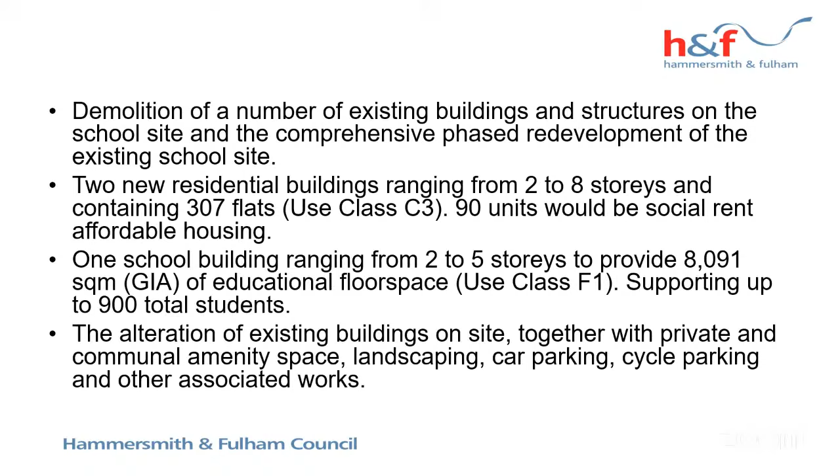The proposal is for the demolition of a number of existing buildings and structures on the site and a comprehensive phased redevelopment of the existing school site. 2 new residential buildings ranging from 2 to 8 stories in height, containing 307 flats to be created, 90 of those units would be social rent affordable housing. 1 school building ranging from 2 to 5 stories, providing 8,091 square meters of educational floor space, supporting up to 900 total students. The alteration of existing buildings on site, together with private and communal amenity space, landscaping, car parking, cycle parking, and other associated works.

The site is shown here, highlighted in red. Phoenix Academy is a secondary school and 6th form that occupies a site of some 2.96 hectares on the northern side of the curve, with access also being available from Bloemfontein Road. The main school buildings, as you can see, are arranged around a courtyard area, varying in height up to 5 stories.

Most of the buildings date from the mid-20th century, but the 6th form building centre, considerably newer, was built around about 2010. There's some aerial photographs here, so you can see the sites. You can see the school buildings here. This long block I'm indicating with the cursor is the 6th form centre, and then you see to the north there's sports facilities and pitches, and a large grassed area to the west of the site, behind the properties on Milfoil Street.

The site is located within the Old Oak and Wormholt Conservation Area and the Cleverley Estate Conservation Area, and the Grade 2 listed former Wormholt Library and centre lies about 200 metres northwest of the site.

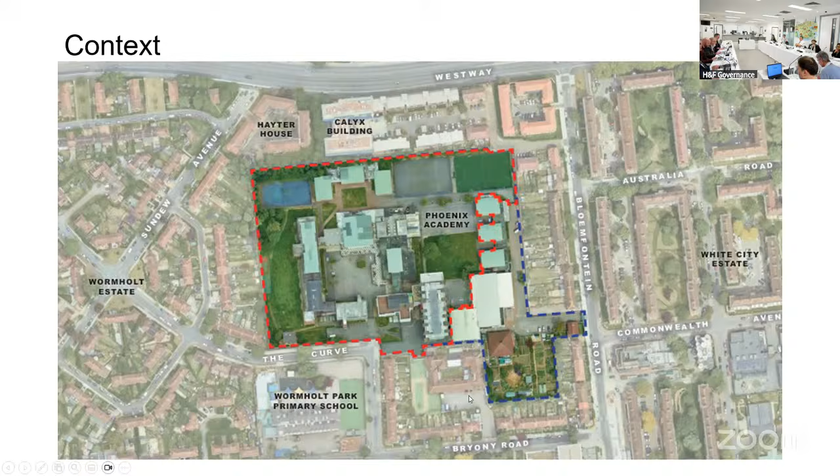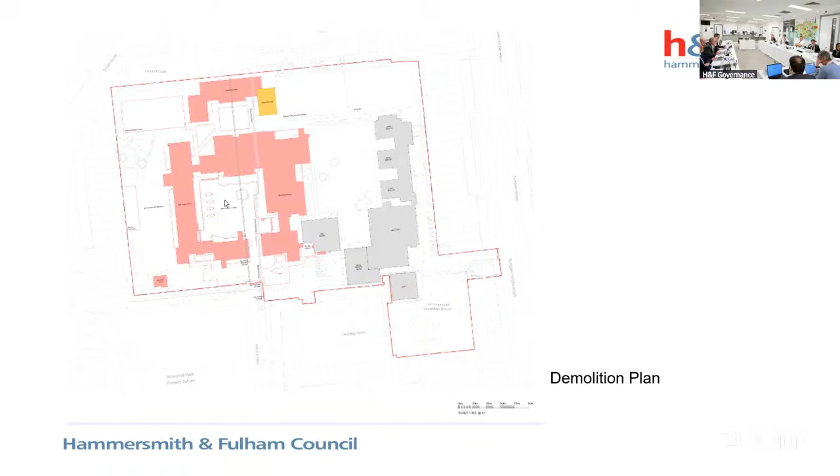This image, the buildings highlighted in pink are to be demolished, and the building in yellow would be demolished at a much later stage. These were demolished at the initial phase.

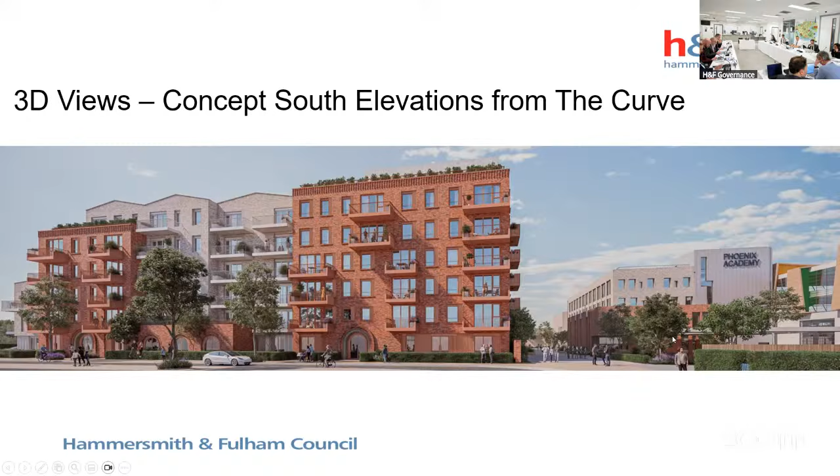These are the elevations, south elevation of buildings A and B, which are the northernmost block of the residential development. Again, keeping a very similar design and style.

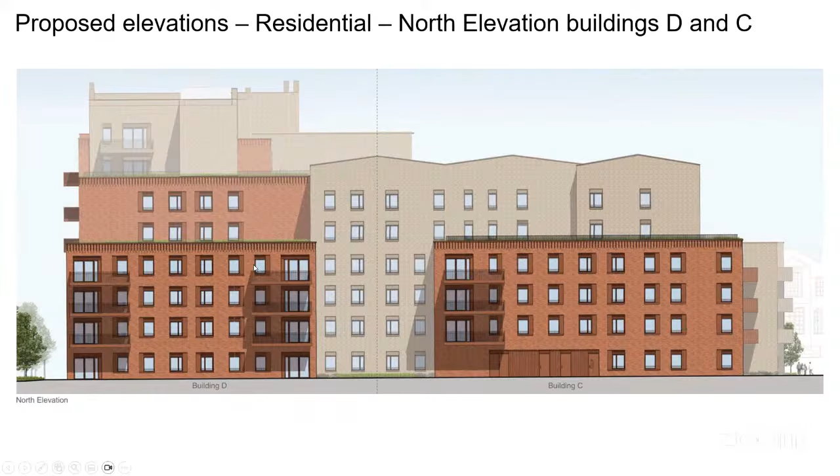This is the north elevation of the southern buildings, buildings D and C, although they are all joined. Again, you can see the red brick and the lighter brickwork. You can see the heights rising up.

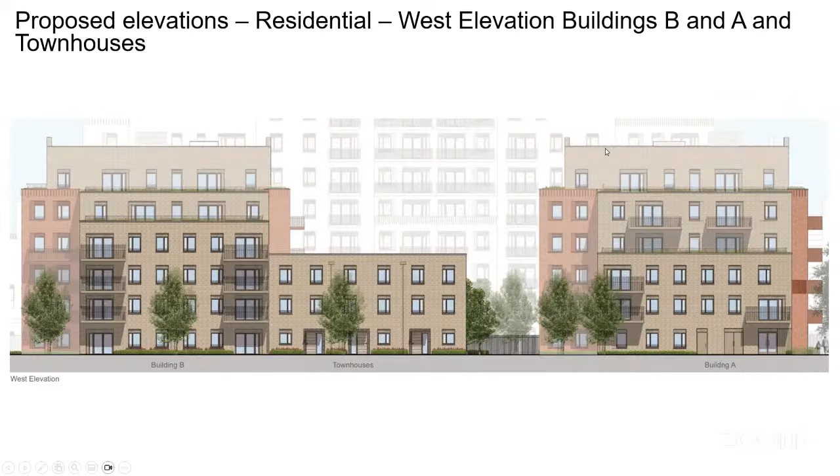It just shows the layout of the flats. You can see there are five flats along this elevation in this block, 4 there. And a lot of the flats, the majority, are dual aspect, although there are some where it is not possible.

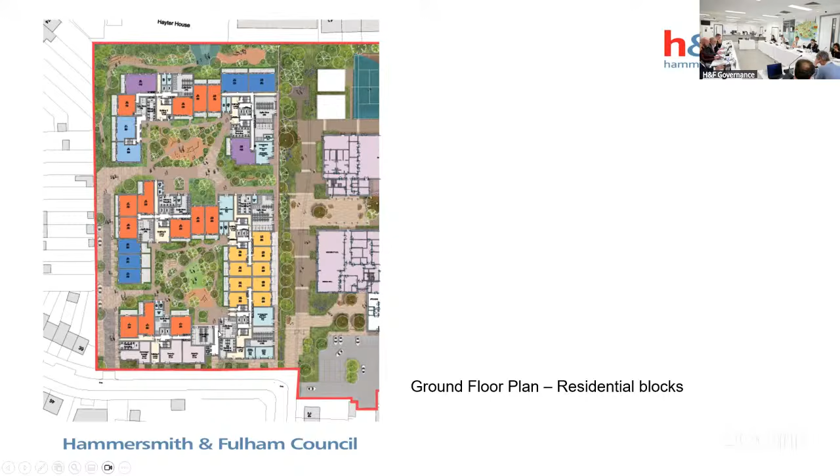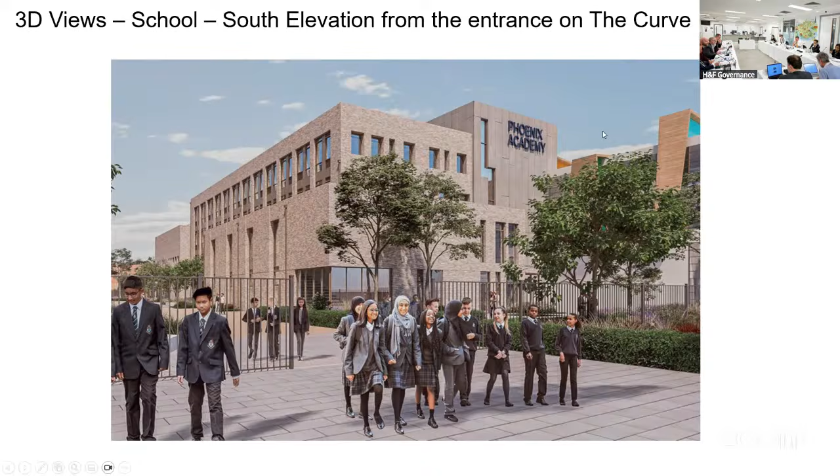There's some 3D views of the school. The south elevation, from the entrance on The Curve. You can see the pale brickwork, very similar to what's been proposed for the housing. And you can see the existing sixth form buildings behind them.

The ground floor plan of the school is set out here. You can see the classrooms and the makeup of the spaces.

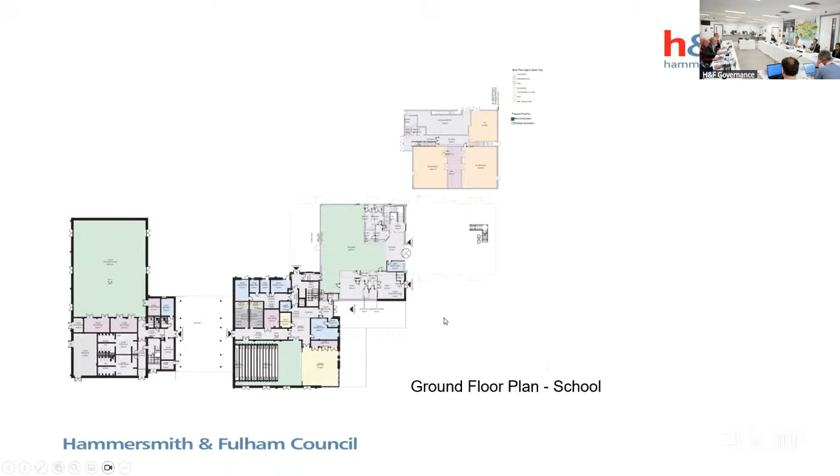And again, the first floor plan, with various classrooms set out. And the second floor plan. And the third floor plan, see there.

The scheme proposes 90 affordable housing units, a mixture of 10% one bed, 40% two bed, 35% three bed, and 15% four bed. Those are the policy targets, HO5.

The scheme provides 11% one beds, which does not meet the policy HO5 target for two beds - it's 13% lower. For three beds it's 5% higher than the policy target, and for four beds it's around 7% higher, a variance of 7%.

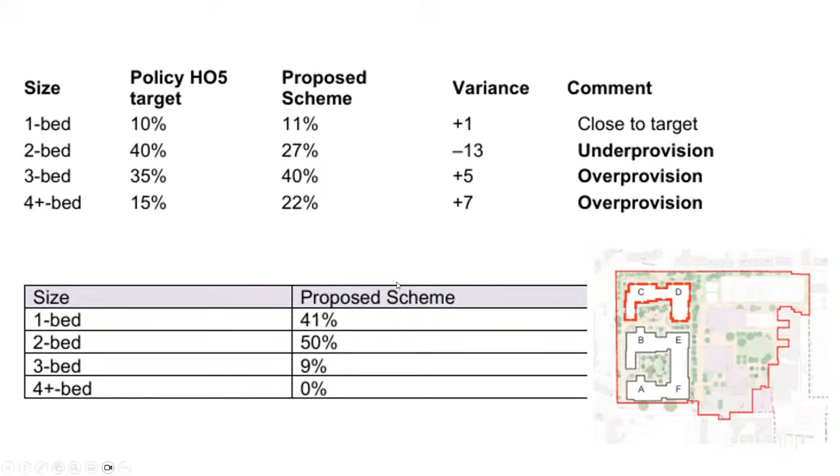The officers have some concerns about the affordable housing. It's all proposed as social rent, whereas our policy would normally seek a mixture of both social rent and intermediate housing. So there's no intermediate housing proposed here.

This diagram demonstrates the existing sports facilities on site. You have Mugas on the northern boundary side, providing soccer, netball, and tennis courts. Then there are allotments here, which provide opportunity for habitat areas.

The existing tree line to the north of the site acts as a noise buffer. There's a Muga there, which is not currently used and is in poor condition. There's another sports facility here which, as shown in the image earlier, is underused.

In terms of the proposed development, the existing Muga is retained and improved. There's another sports area here provided, and then there'd be an outdoor classroom, storage sheds, heat pumps, etc. There are some small playing fields, as well as a student exploration area, here where the cursor is.

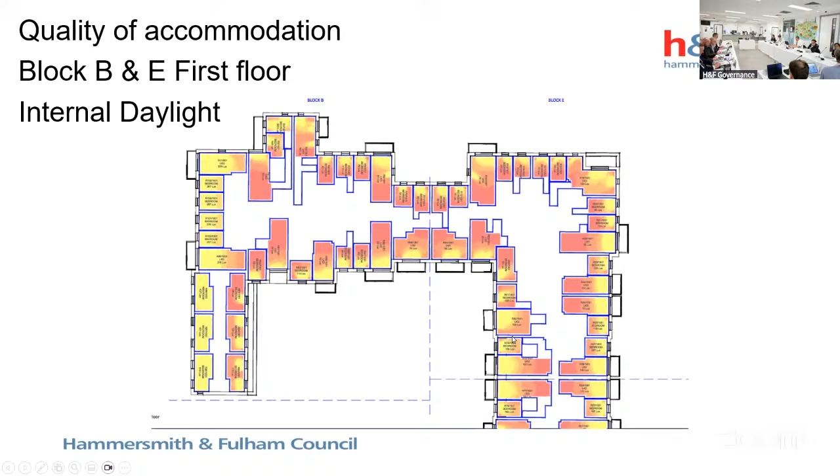In terms of the accommodation provided, for this block on the first floor, the diagram here shows internal daylight to the rooms of the block. The red/pinkish areas are where there is not satisfactory provision of natural light, and the yellow is where it does meet acceptable levels. Officers have concerns - there are a number that meet the target, but there are a significant number where internal luminance is a concern.

So we do have concerns about the cumulative impact in terms of daylight and sunlight with regards to these properties and their amenity space.

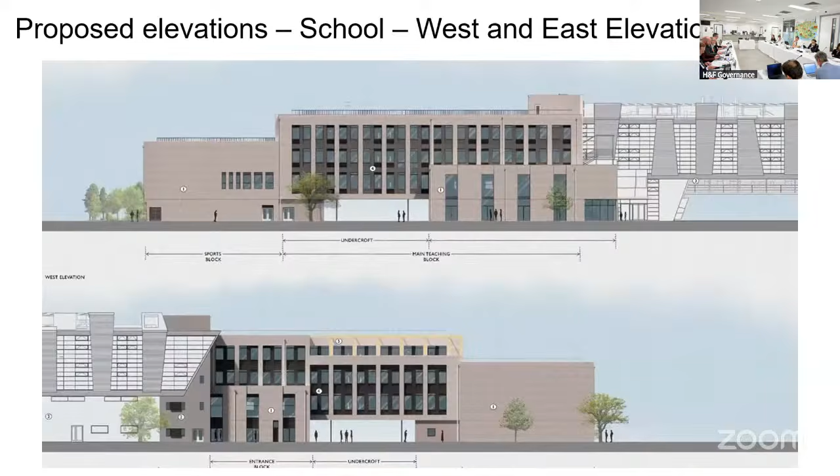The new sports hall, if I can show you back up - sorry, the new sports hall, which is here, is going to be a benefit, because if all other matters were considered acceptable and we were looking to approve, then we would seek for that to be made available for perhaps external use, subject to agreement.

Sport England have strongly supported the principle of community use agreements.

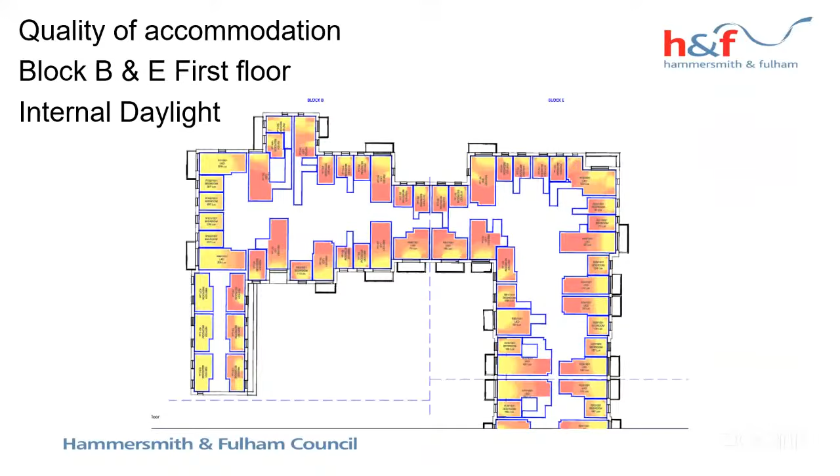At present, the concern that we do have is that Sport England have raised concerns that the sports provision is not acceptable, as it does not replace what is there currently. So there are concerns both from officers and Sport England with regards to the level and quality of the sports provision.

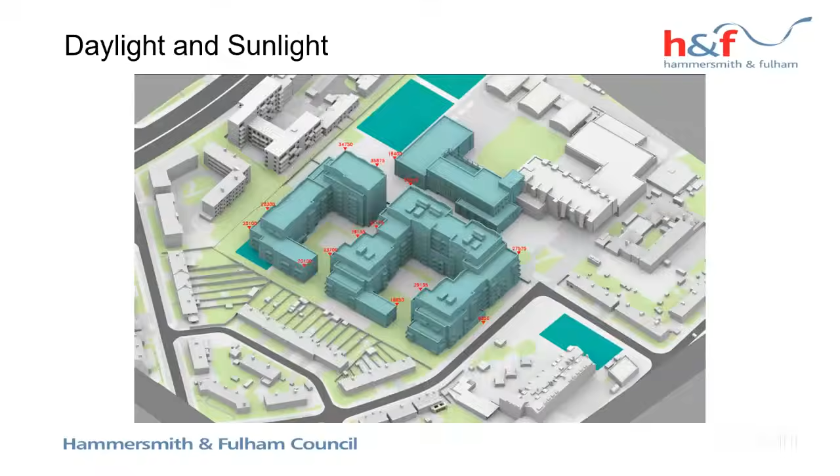So on balance, officers have weighed up the benefits and the concerns about the development, and our view is that the application should be refused. We feel the benefits do not outweigh the harm.

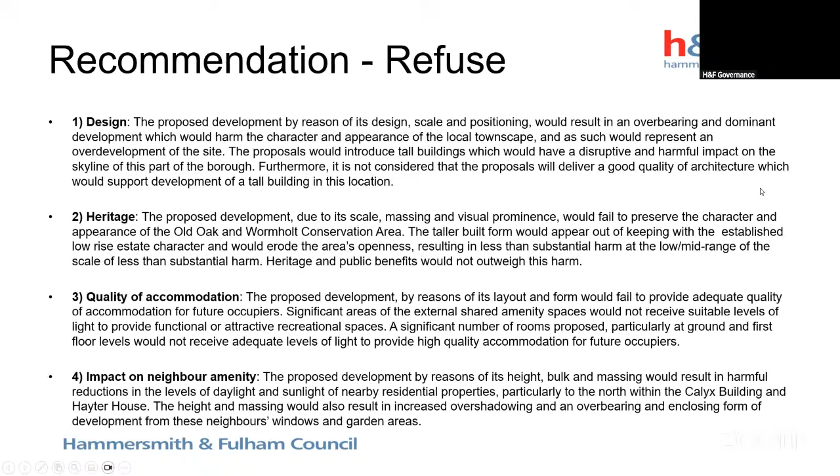It's also considered that the development, by reason of its height, bulk and massing, would result in harmful reductions in the levels of daylight and sunlight to nearby residential properties, particularly to the north at the Calyx building and Hayter House. The height and massing would also result in increased overshadowing and an overbearing, enclosing form of development to these neighbouring windows and garden areas.

Regarding the sports facility, the development fails to demonstrate why existing sports facilities and open spaces are surplus to requirements, that replacement sports facilities are of superior quality, or that there are other clear benefits resulting from the proposal that outweigh their loss. On affordable housing, the development did not adequately justify the provision of affordable housing, which would fail to meet adopted requirements in terms of the amount, tenure, mix and location of the units.

On biodiversity, the play space would result in the loss of on-site habitats of moderate value that would not be replaced on site in accordance with the biodiversity net gain trading rules. The development would also result in the loss of a category B tree, for which no mitigation has been proposed. There's also inconsistency between the tree surveys and the documentation of the landscaping statement. The urban greening factor calculation and BNG assessment are such that the accuracy of these calculations cannot be verified, resulting in a potential failure to achieve the values set out in the application documentation.

And in terms of school parking, the development, by reason of over-provision of parking spaces for the school without robust justification, is considered to be unacceptable and would result in vehicular movements as well as having an impact on highway conditions to the detriment of sustainable transport modes.

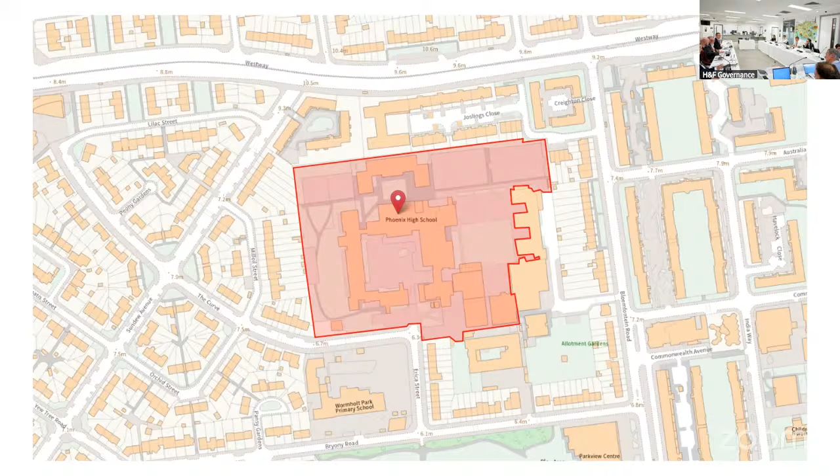Yes, as I said in the presentation, the affordable housing is all in the northern block, in this block here in the northwest corner of the site. All the affordable units are together there. I understand that in itself, the way they're located goes against the local plan policies. Ideally we prefer to have a mixed community, mixing the affordable housing throughout a development scheme. It doesn't always happen, but that's certainly what we strive for.

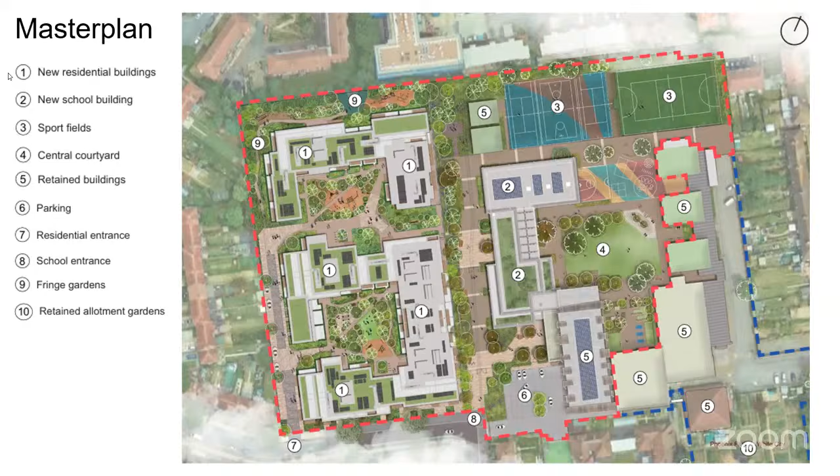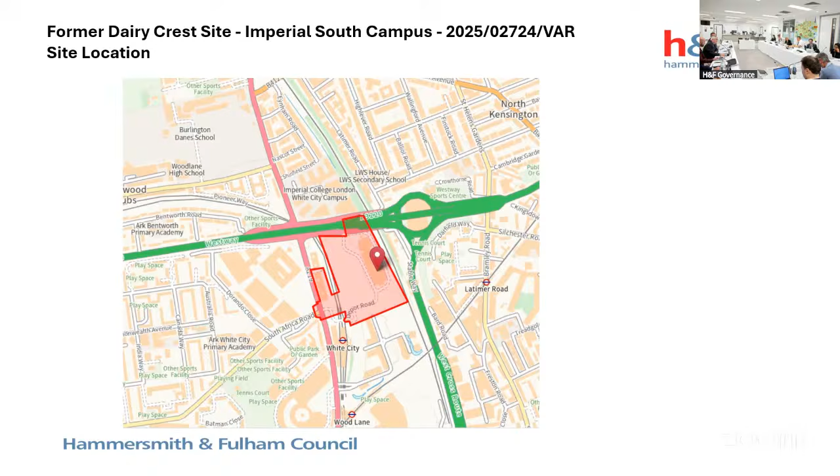This next slide shows the application site outlined in red. Outline planning permission was given for an employment-led mixed-use master plan, which also included a residential element of up to 373 residential units. The development is planned to come forward in 4 phases and 7 zones over an estimated period of 21 years. The application site itself is just over 5.6 hectares in size, located within the White City Opportunity Area and in one of the borough's regeneration areas.

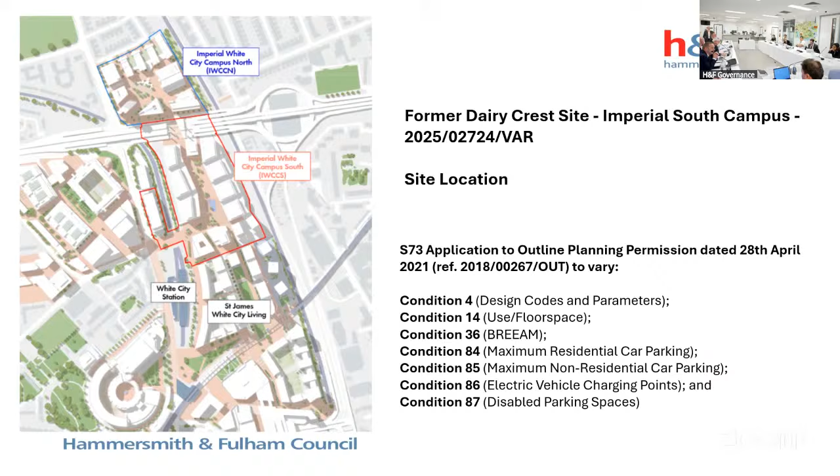This next slide shows the proposed changes made to the Section 73 application. As pointed out, the key driver for this is the proposal to include academic floor space within the master plan of up to 42,200 square meters. This results in changes to key control documents like the parameter plans and the development specification, and the bullet points listed summarize some of the key points and changes.

Another key driver is the removal of a basement ramp and tunnel that was granted in the original outline planning permission. This will now result in an at-grade delivery and servicing arrangement. The other key factor is a substantial reduction in car parking spaces on the site, which will now effectively be a car-light development with only 23 blue badge spaces proposed.

The other key factor is the energy strategy. When this permission was granted, it proposed a gas CHP system. What's now being proposed is a more decentralized air source heat pump system. This will be heated on a plot-by-plot basis, although there are aspirations for this all to be connected to a wider heat network.

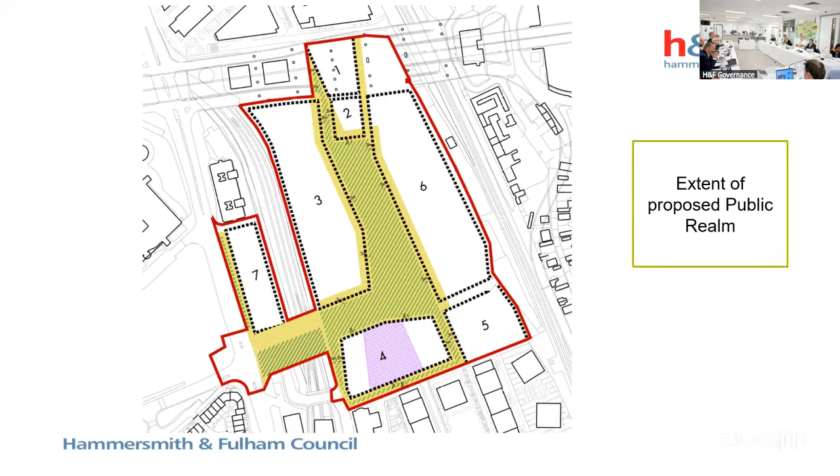This next slide summarizes the proposed floor space. Now, the key issue here is that there's no uplift in the maximum floor space of the development compared to the original outline planning permission. What has been introduced, though, is the academic floor space, which is 42,200 square meters. This allows the applicant some flexibility in terms of what uses come forward within that overall cap.

The next slide shows the changes between the consented and proposed zones, and on the right-hand side you can see development zone 3 is now split between the academic element, which is in green, with the research and development floor space in blue.

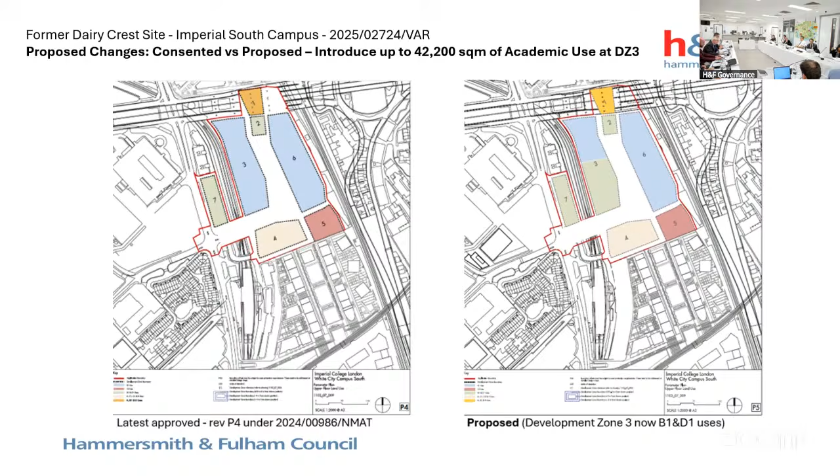The next two slides effectively show the proposed changes to the access and servicing strategies. The servicing arrangements will be operating in a loop system via the bridge access, either clockwise or anti-clockwise. Obviously the key element here is ensuring that pedestrian access is retained, because one of the key drivers of this master plan within our local plan is retaining connectivity through the site to other sites, either to the north or south of the campus.

And then lastly, I just wish to bring members' attention to the proposed academic use. Although this isn't formally being considered tonight, I just thought I'd show you some slides. So this is the location of the academic building, which is on the left-hand side.

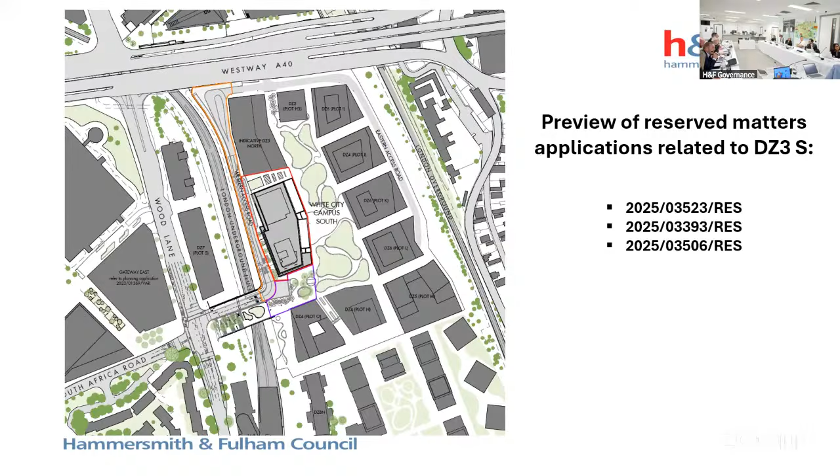The next two images show the location of DZ3 South in context with DZ3 North. Development zones 3 and 6, with zone 6 being where the scale space building currently is, are the two largest development zones within the master plan. As you can see, the academic building will be a key building in this master plan, given its location

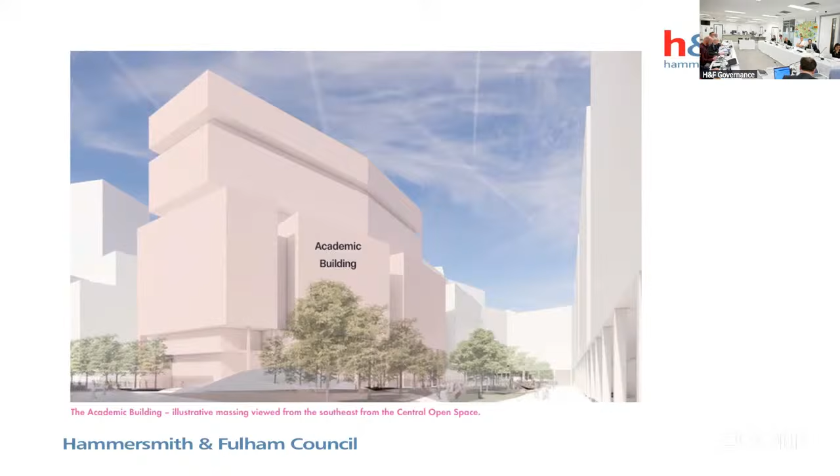by the new bridge. Lastly, some images of the illustrative massing of the academic building, and two CGI images of the proposed building being considered under the reserved matters application.

The recommendation to committee from the executive director of place is that planning permission be granted subject to conditions and the completion of a satisfactory deed of variation to the section 106 agreement.

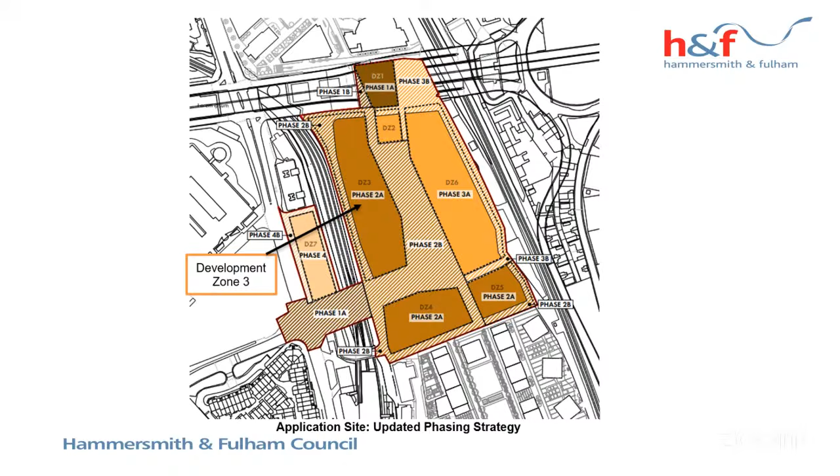Councillor Kamel, quick question. Yes, thank you. Do we have any reasons given by the applicant as to why the CHP system is being replaced with a more expensive system?

Well, obviously the aspiration of the applicant is to create a fossil-free system, which is in line with the London plan. Can I interject, Councillor Carmel, that I disagree with the assertion that a CHP system is cheaper than a heat pump. It's widely reported and widely known that the running costs of a heat pump or networked heat pump system are significantly lower and would return on the investment within a few years. I'm grateful for that, because I know you have specific expertise in that, so I will replace what I have been told before with what you have said. Thank you.

If I've understood this correctly, there's a 10% increase in height on these buildings, and the addendum - sorry, no, I'll get on to that, that's the next bit - also refers to changes to the setback. Do we have a comparison picture so we can judge what the difference in height is and how the setback is done? Will the setback cover the entirety of the increase in height? And can we compare what was approved in the original outline application compared to what is being proposed to us tonight?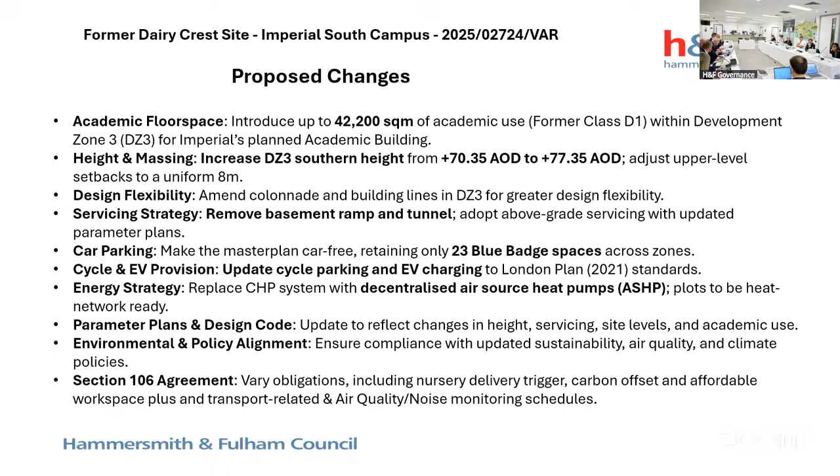What I can show you is the CGI images. Just before you do that, John, just to re-emphasize what John said earlier, which may have been noticed.

This is not an application for the approval of the building. This is to change the parameters. It's more like changing the jelly mold, if you like, of what could be designed within them. So the height is necessary because the building will be higher, but it doesn't actually design the building, it just allows for it. So what you're seeing now is actually the reserved matters that's come in. This hasn't been to committee yet, and it can't go to committee until the 73 has been approved.

Okay, thank you. Are there any further questions? Yeah, just a quick one again, not again, but on the addendum. I noticed on the addendum, on page 209 of the application, on paragraph 12.73,

it appears to me, and I could be wrong, that due to copy and pasting, you included some of the information that was used for the Earls Court development site, because it talks about the former exhibition centre building, and you've just taken out two sentences. But does the rest, for instance, the mention of June 24 and the recent geoarchaeological monitoring of the geotechnical works and watching briefs to the east of the site, relate to this site, or is that also copied? It just seems, if you're having specifics about specific dates, that you accidentally copy and pasted it, and it happens. I just want to make sure that this is now going to be the right information before us.

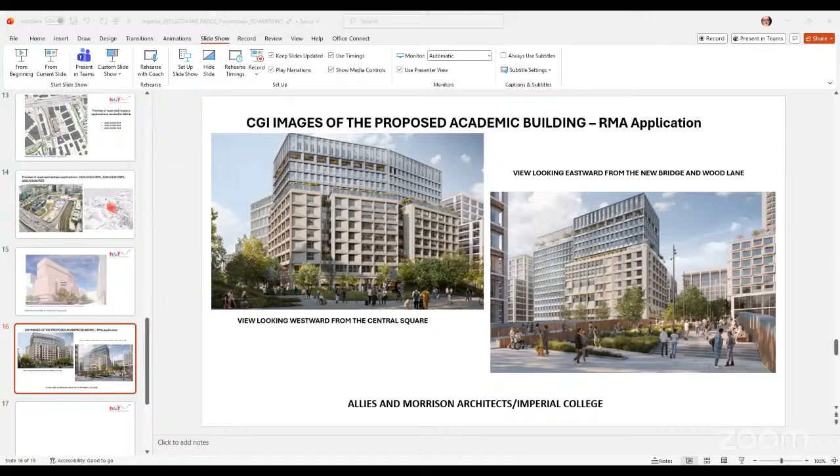Probably should. Another year at least, isn't it? Just delayed during COVID at one point.

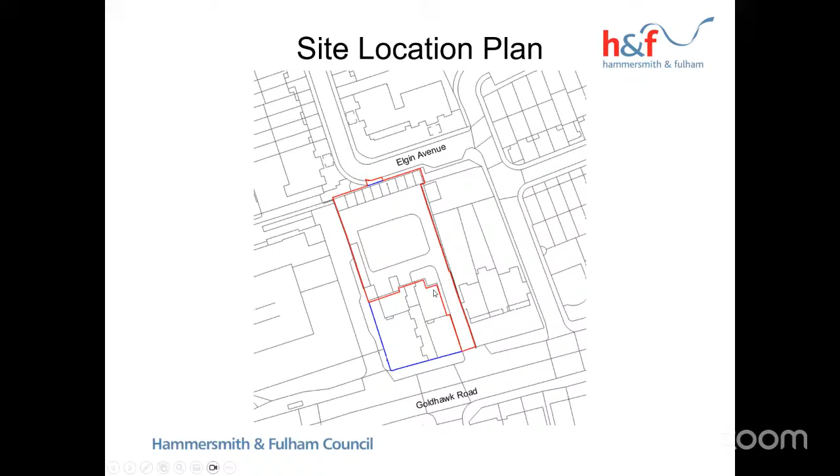It's a council-owned scheme proposal. Site is shown here. The Grange itself is in that blue section to the front of the site, and you see the row of garages to the rear on the north of the site, backing onto Elgin Avenue.

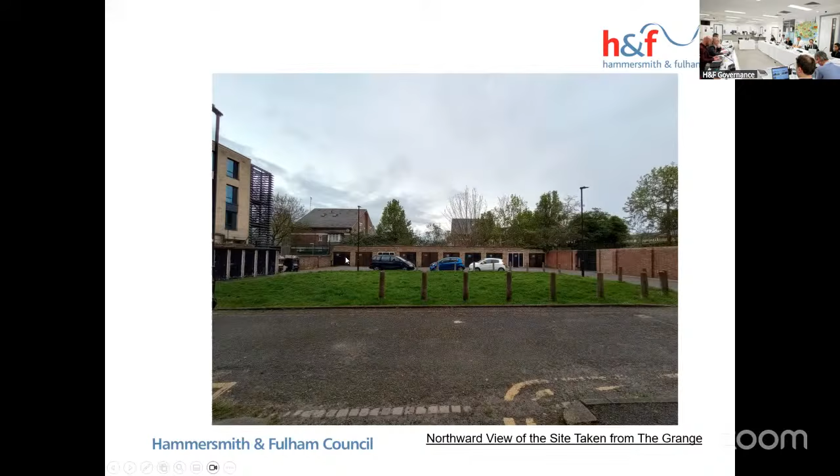Some site photographs: this is the entrance into the site from Goldhawk Road. You can just make out garages to the rear. There's this informal green space in the middle, and some pram stores on the left, and these garages to the rear. The garages are vacant at the moment; they're not used.

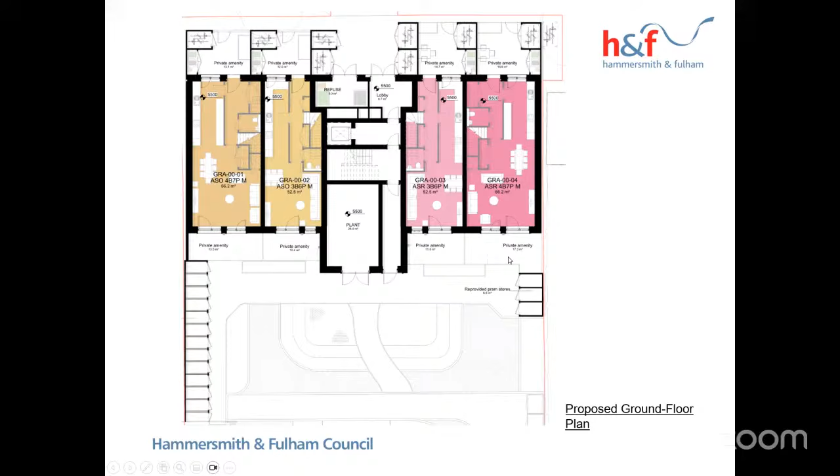The ground floor proposal shows 4 maisonettes, all dual aspect. The pram stores are located here on the left still. Three pram stores would be lost in the development but have been re-provided on the other side. The maisonettes have private amenity space to the front and rear of the site, with a plant room, lift and stairs up.

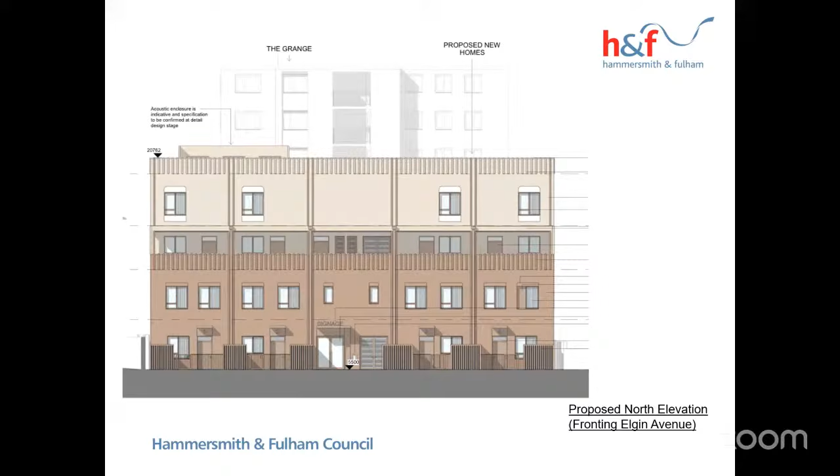The north elevation of the new units faces onto Elgin Avenue, and the southern elevation faces onto the Grange. And then just a quick section through the site.

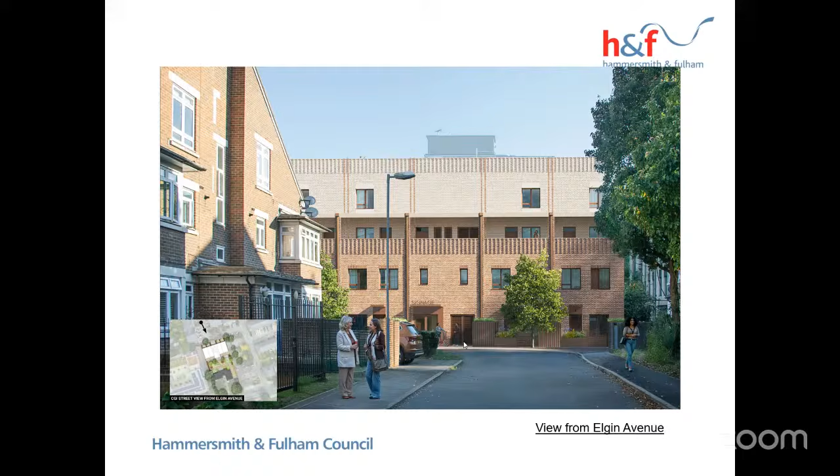The CGI is the view from the existing Grange, showing the landscaping and communal amenity space which will be available for future residents as well as the existing residents of the Grange. That's the view from Elgin Avenue, where the units would have access.

There will be 100% affordable homes provided. It's only 8 units, so it doesn't trigger the policy requirement; however, it's a council-owned development, and all 8 units will be affordable. 75% of them would be shared ownership, with 25% being for rent.

These matters have been resolved. On overlooking, there are no problems from the new units to existing windows. The rear garden of the nursery would be overlooked, but it is overlooked currently, so there's no real change. Officers are recommending that planning permission be granted, subject to legal documents and subject to conditions. Thank you.

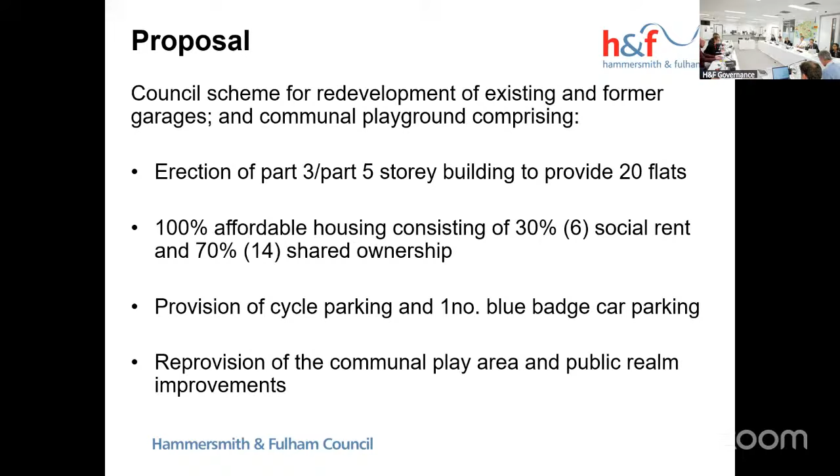The site is bounded by Askew Crescent to the northwest and by residential blocks within Becklow Gardens estate to the north, east and south. Vehicular access to the estate is provided from Askew Crescent to the north, as well as from Becklow Road to the south. The site is not within a conservation area.

The surrounding area is predominantly residential. You can see just to the top of the site are 5-storey residential blocks of Becklow Gardens, and to the bottom of the site and adjacent to it are 2-storey terrace housing on Askew Crescent.

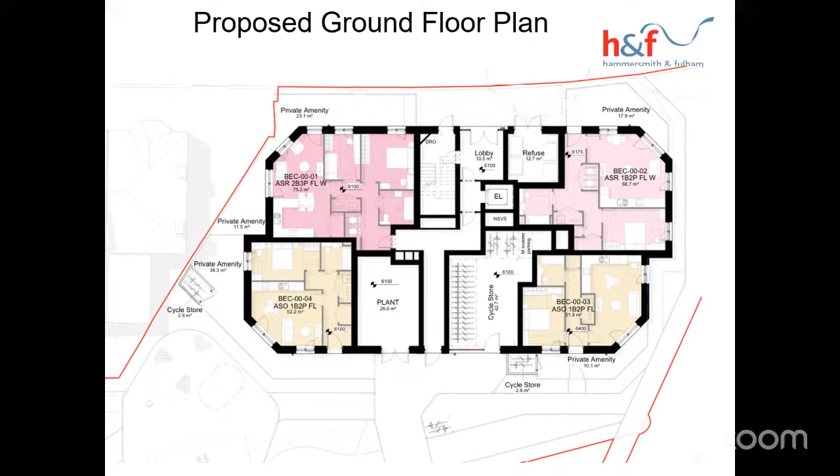The residential units will be spread across 5 floors and will consist of 7 1-beds, 11 2-beds, and 2 3-beds. This is the proposed ground floor. 10% of the units will be wheelchair accessible, and these are the 2 units here, front, highlighted in pink - a 2-bed and a 1-bed.

Long-stay cycle parking is provided internally here, as well as within the rear gardens of the 2 flats at ground floor level. There is also short-stay parking here to the rear of the site, and refuse storage is provided internally to the Askew Crescent frontage, where it will be collected.

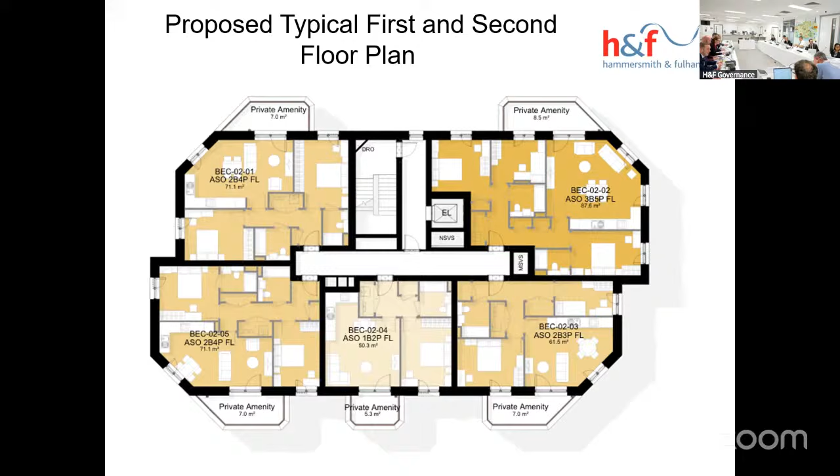This is a proposed typical first and second floor plan. As you can see, all units would benefit from private amenity space in the form of a balcony.

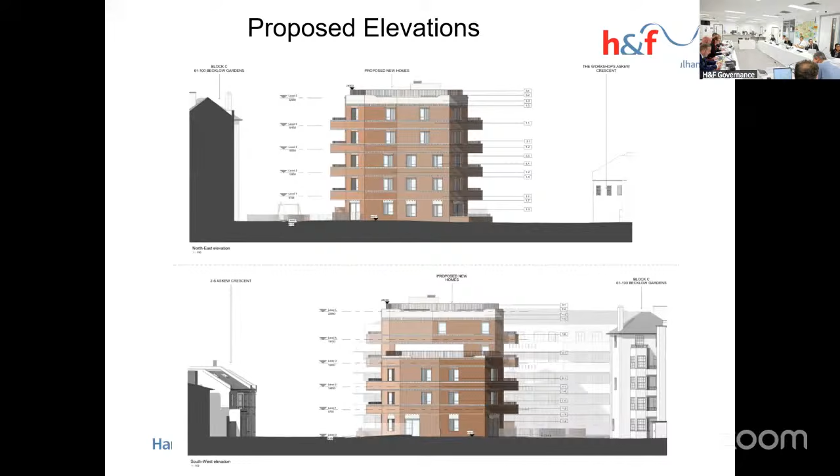These show the proposed building a little better in terms of its context. As you can see in both plans, the images illustrate how the building has been designed to provide a sensitive transition between the 2-storey residential properties on Askew Crescent and the 5-storey apartment block at 61 to 100 Becklow Gardens. This is an illustrative view from Askew Crescent.

The architectural treatment is a contemporary interpretation of the 1930s architectural style of the original Becklow Gardens buildings, being based in red brickwork with decorative horizontal bands and contrasting patterns of white and red brickwork.

In addition to the provision of 100% affordable housing, as part of the legal agreement, officers have also secured local employment and training initiatives, a carbon offset payment, monitoring fees for various documents, as well as the dwellings being car permit free.

Overall, the proposal would increase the borough's affordable housing supply while delivering a high standard of residential accommodation. It would provide public realm and play space of improved quality, benefiting both future occupants and existing local residents. Development would enhance the street scene, and impacts on neighbouring amenities are considered acceptable. Subject to conditions and Section 106 obligations, there would be no significant impact on the highway network or local parking.

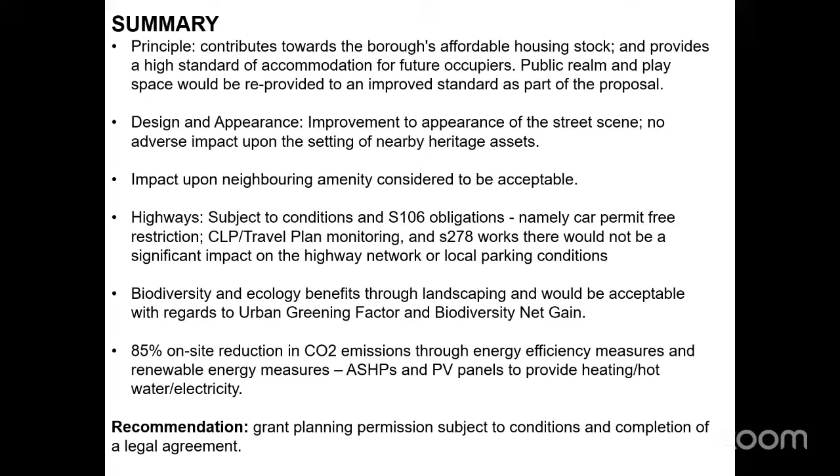Biodiversity and ecological enhancements would be achieved through landscaping, which either meets or exceeds targets for urban greening factor and biodiversity net gains. The scheme also delivers an 85% on-site reduction in carbon emissions through energy efficiency design and renewable technologies, including air source heat pumps and PV panels.

On this basis, officers recommend planning permission is granted subject to conditions and the legal agreement. Thank you.

Thank you very much, Sam. I'm really pleased with this application. I think especially this looks very good, and I definitely agree with your assessment that it adds to the streetscape in terms of design. Any questions or comments from members of the committee?

Sorry, Sam. I'm not sure if I can answer that question. I'm not sure whether it would be the developer who pays it, who would be implementing the scheme. I can just double check.

Through the chair: it depends on the delivery vehicle that's used. In this instance, if there is a council-owned delivery, then we'd have to enter into a memorandum of understanding similar to what was agreed with the Avonmore school scheme. If there's an external body involved, then there could be a legal agreement, usually in the form of a unilateral undertaking with a confirmatory deed, so that once they take interest in the site, they're liable for the payment. So it really depends logistically on what happens in terms of delivery post planning. But what we're saying to committee is that it will be secured in one way or another.

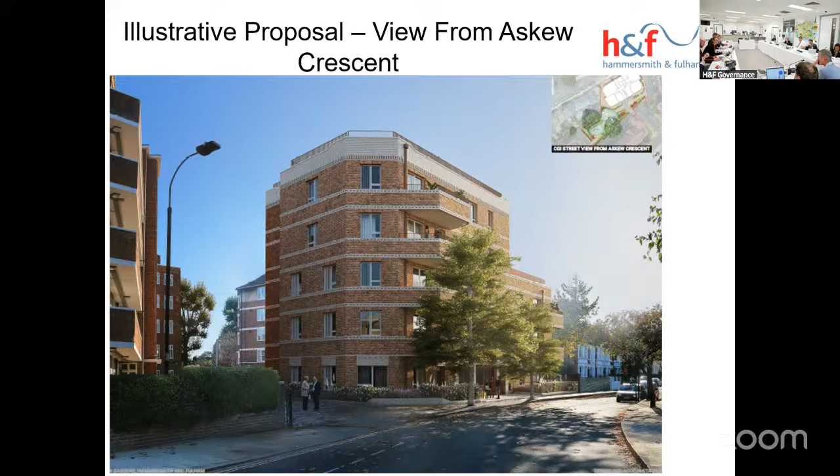Thank you. It's definitely not a category A tree, it's a young maple tree. I can just show you the location of it. You flipped the site plan with the photograph. So sorry, the other way around.

The maple tree is in this location here, and the arboricultural officer was happy for that to be removed - they didn't deem it of sufficient size or quality to retain. However, the scheme does retain all of the other trees, and introduces 3 new trees, so there would be a net increase of 2 on the site. Those trees are going to remain, and there is sufficient protection for them during building works. The application is submitted with an arboricultural impact assessment, including protection measures during and after construction, and we have a condition requiring the scheme to be implemented in accordance with those measures. So we're happy that they would be retained.

And you talked about reproviding play space - if I may move on, Chair. It looks like quite generous play space. Is it of comparable size to what is there now? Yes, simple yes please. Oh, well, I can give you figures, but otherwise, yeah. Councillor Kamal appreciates brevity, so a simple yes will do.

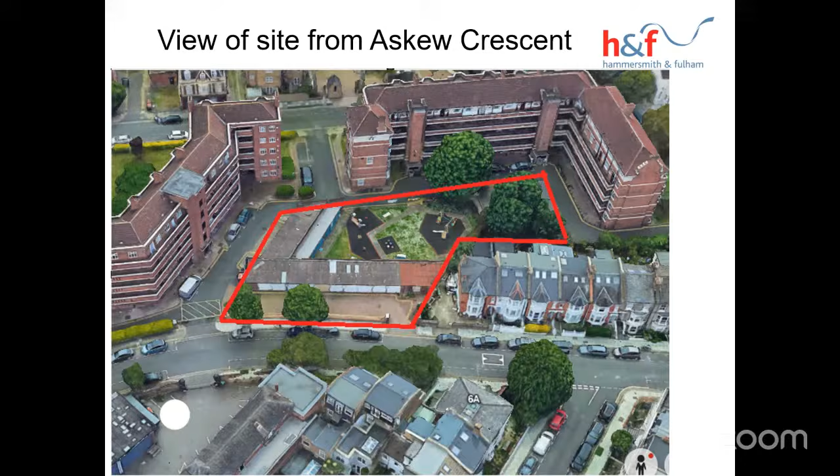And now on whether recommendation 2 on the same page of the report is agreed. Councillor Trehi? For. Councillor Melton? For. Councillor Painter? For. Councillor Pascal-Silbury? For. Councillor Kamal? For. And I will also be voting for, and therefore the item is approved.

Thank you very much, and thank you, Sean. We move on to items 8 and 9, essentially, which are both for Sacred Heart High School. We'll be taking 2 separate votes on them, but there will be one presentation from Neil Egerton.

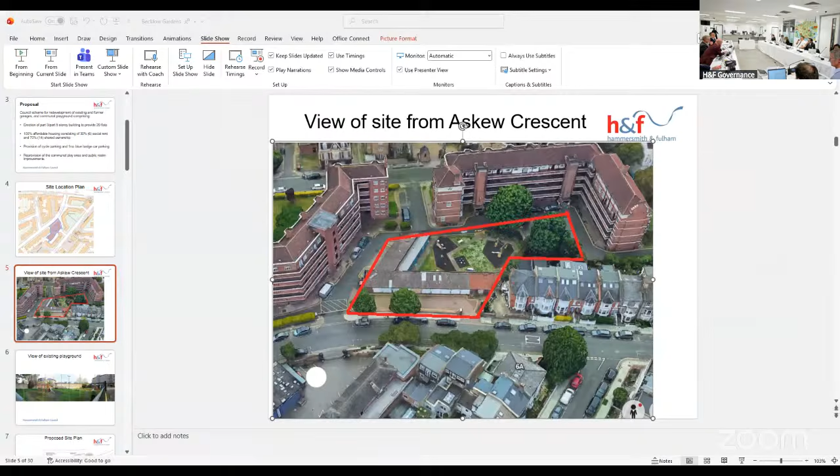Okay, next one. Pretty quick.

Thank you, Chair. The applications relate to Sacred Heart High School. It's a full and listed building consent application, relating to the conversion of the Stewart building, an existing gymnasium dating from the 1930s, into a school theatre and performing arts centre, with an extension to the east elevation in front of the building with a mezzanine level out to the existing courtyard to provide foyer facilities, erection of an infill extension to the west elevation, a very small extension, and other internal and external alterations.

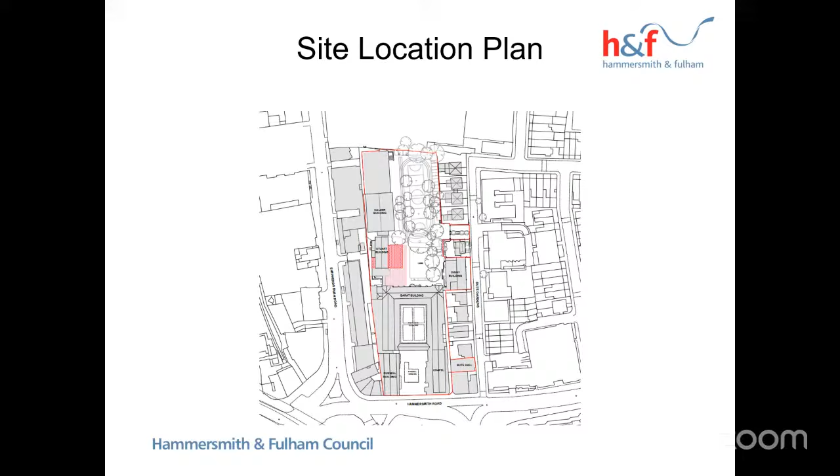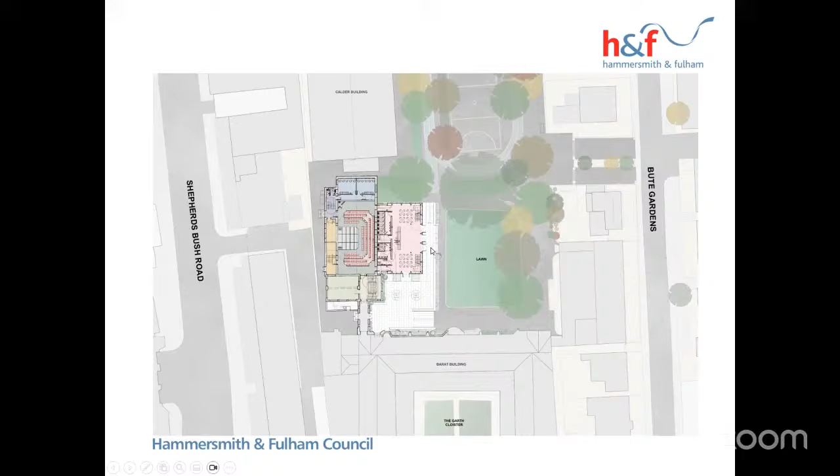The drawing here shows the gym converted into the stage, with seating around, a backstage area behind, and a foyer and reception area with a terrace outside designed with permeable paving and ramp access to allow easy access into the site. Here's a slightly larger plan.

You can see the seating for the stage, which is mainly here, and there are existing departmental offices which remain. Dressing rooms are created, with a small extension to the rear allowing for the backstage area.

This shows the terrace outside, with ramps from the north end and from the south end to allow access.

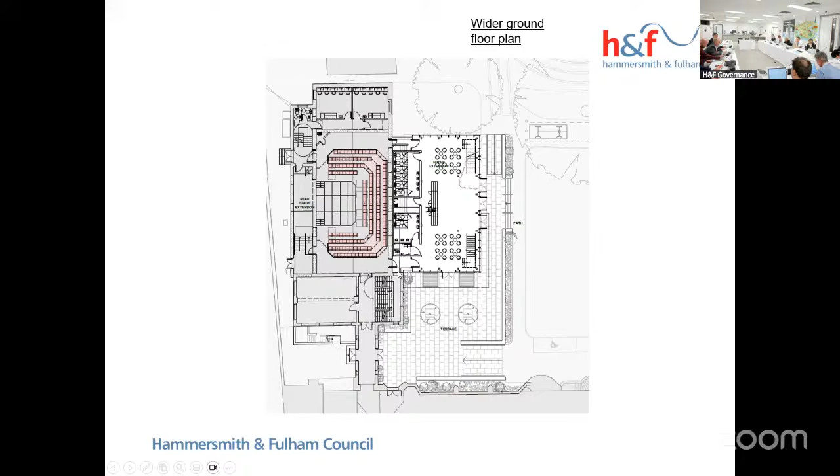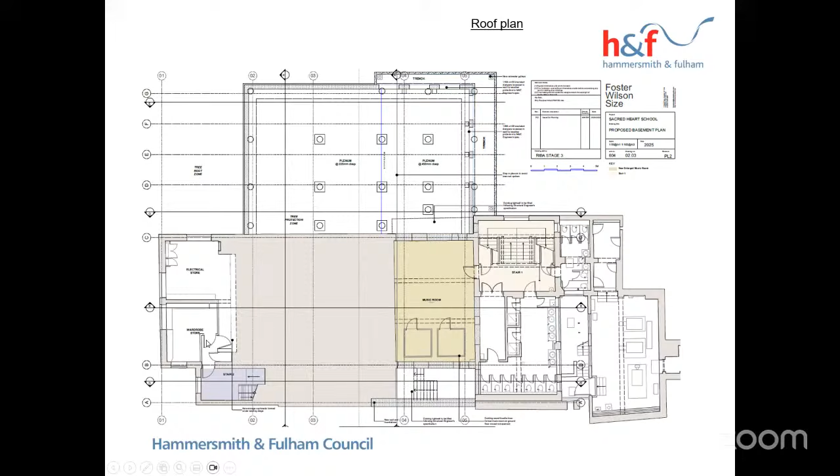This shows the basement level, which is a clean room. There's an existing music room, electrical store, and wardrobe store, plus toilet facilities and staircases, but no real change at basement level.

Access to the site would be from the east side, and you can see the route here takes you along and allows easy access for both visitors and students.

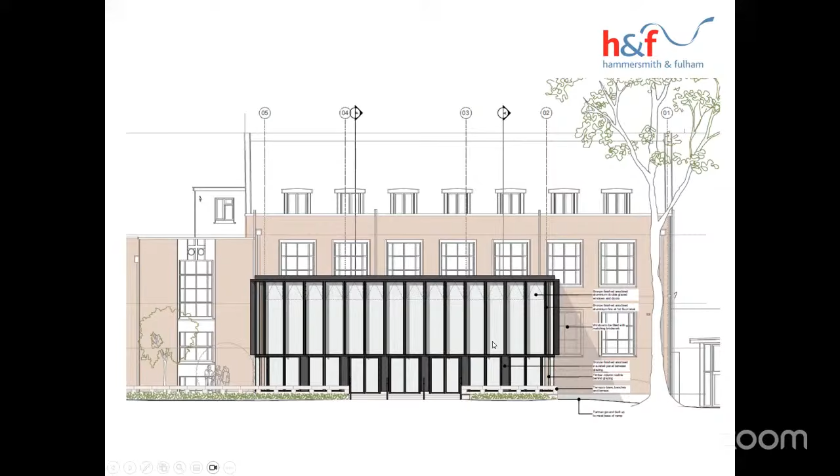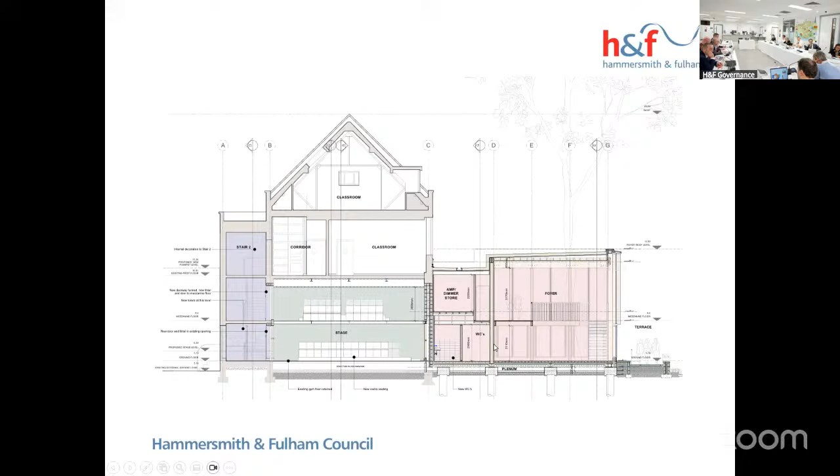Here's the section through the building, so you can see the foyer area and the slight upper areas between the stores.

Just a CGI showing it - you can see the mature tree retained, and there are conditions to ensure the roots are protected during development, if consent is granted.

Whilst there'll be a small area of lawn lost, there will be rain gardens planted, as well as this terrace area being put to more functional use for students, permeably paved, together with an attenuation tank to help deal with water runoff from the site. Another image there.

And just some views from inside.

The legal agreement will include air quality and construction logistics monitoring fees. We'll also ensure a community use management plan is provided, because outside school hours the facility would be available for hire for other schools as well as the local community if they want to have events there. So we'll make sure that's all covered, along with the community use travel plan.

As such, officers are recommending that planning permission be granted subject to conditions and a legal agreement.

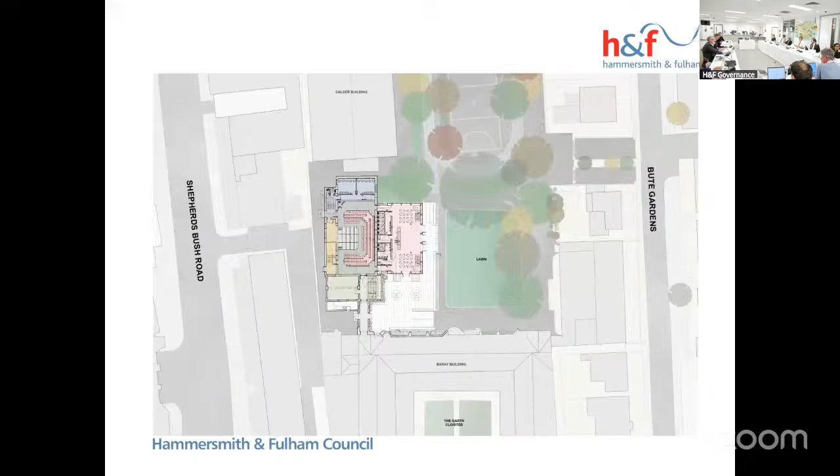Just a short statement on behalf of the school. The proposal is for the conversion of a gymnasium at the heart of Sacred Heart School in Hammersmith into a 225-seat theatre space. The gym dates from 1939 and is too narrow to properly use for sport. It is now redundant, having been replaced by a new sports facility on the north side of the school. The new theatre space proposed will be multi-purpose and can be used for drama teaching, performances, assemblies, music, rehearsal and lectures.

The theatre can be accessed from a separate entrance on the east side of the school on Bute Gardens, and will be available for a wide range of community uses out of school hours, including music and drama. The theatre will have an assisted natural ventilation system that makes use of a raised void below the terrace and above tree roots for air supply.

The proposals include an adjoining theatre foyer built from an exposed timber frame with a latticed timber roof. The foyer has similar flexibility to the theatre space and can be used by pupils as an informal cafe and seating area during the day, as well as a rehearsal space.

The reuse of an existing building with assisted natural ventilation, together with the construction of the extension in a carbon capturing timber frame, make this a sustainable proposal to create the new teaching spaces required. The new foyer will enable the theatre to operate independently for external hire and community use.

Landscaping is included in the proposals with a small new terrace for pupil and audience use, with additional trees, planting and soakaway drainage to reduce water runoff. The school is in urgent need of the new facilities and would be excited to start the project.

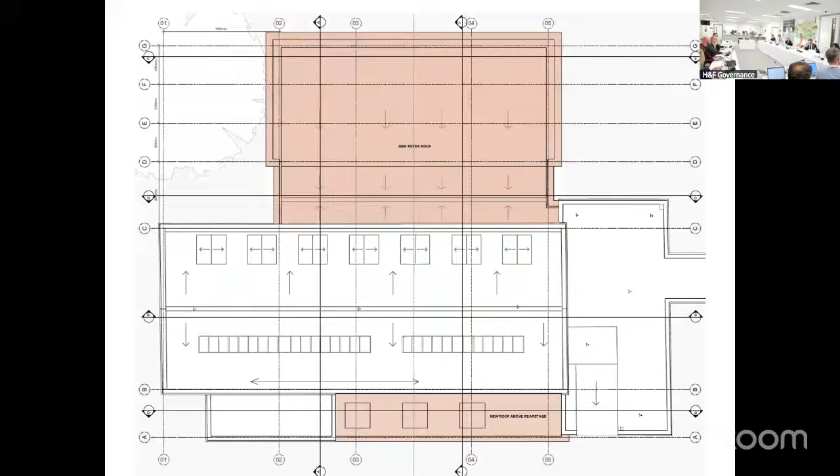Can you pull up the CGI of the glass placement? And have you got the picture of the existing building, or whatever it's called, Stewart building? From the outside.

Now the inside, I think everybody can agree is dated, but it's quite nice, dilapidated. But the outside, to me, has merit. And I have a predisposition towards educational facilities in this borough anyway. I have absolutely no problems with the repurposing, and I will be supporting the planning application.

But I cannot see how, if we go back to the external picture of the new one that you just showed, the glass, the CGI of the glass monstrosity, I cannot, in all good conscience, say that that preserves and enhances the listed buildings. I will be voting for the planning application, and I can't bring myself to vote against the listed building consent, but I will be abstaining because I cannot, in good conscience, say that that preserves and enhances the listed building.

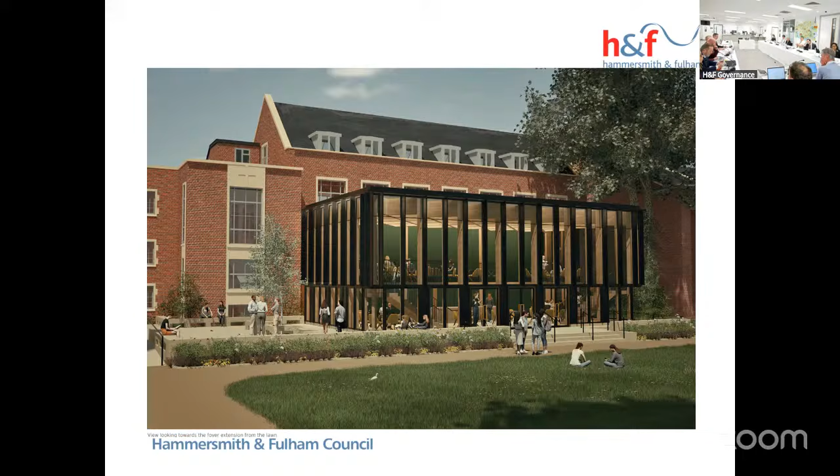Thank you. Alan, would you like to comment on that? Thank you, Chair. So just to be clear, can we go forward now to the supplementary plan? In terms of the actual fabric of the main building, the extent of demolition to facilitate the new building - if we go forward to the elevation, the building itself is preserved in terms of the elevation, so it is just the window openings that are basically repurposed for access.

The building itself isn't the most fundamental part of the listing, it's part of the group listing. And again, that's why on balance we're taking a view that this extension is considered appropriate, to repurpose and provide this new facility for the school campus. It's in the kind of second quadrangle of the school. It's not the most important function, but I think that's why we've taken the view that this is an appropriate development in terms of its quality as well. And again, we've got conditions relating to details to hopefully give some more certainty over that.

I appreciate all of that, and I'm not going to vote against the planning permission. I'm not voting against the changes to the existing listed building. It's this new building in the curtilage, and it's completely surrounded. I am applying slightly different weight, and I won't vote against it. But I hope that officers can understand, especially those with long memories, how I do take a slightly different line with listed buildings, having been brought up in one in the borough.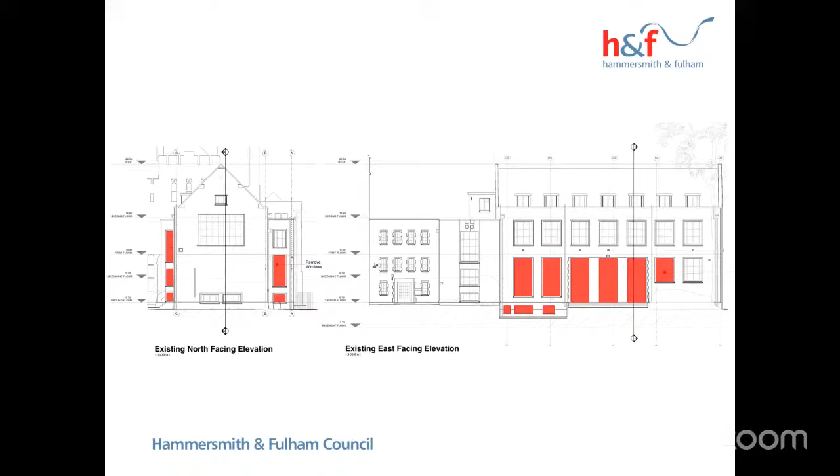So I'm not sure in terms of the representation. Let me just check this, because I think it may have been on the original submission. I'm not sure if that was a revised consultation or the updated proposals. We have given the consultation comments weight. Generally this is a scheme where we're taking on balance the view of what a contemporary extension should be for this proposal.

Thank you very much. If there's no further questions or comments, we can move straight on to voting.

First on item 8, and then on recommendation 1 for item 8. Councillor Trehi, are you voting for, against, or not voting? For. Councillor Melton? For. Councillor Painter? For. Councillor Pascal Tilbury? For. Councillor Carmel? And I will also be voting for. On whether recommendation 2 in the report is agreed, Councillor Trehi? For. Councillor Melton? For. Councillor Painter? For. Councillor Pascal Tilbury? Councillor Carmel? And I will also be voting for, and therefore this item is approved.

The connected one, item 9, which is the listed building consent. Councillor Trehi, are you voting for, against, or not voting on recommendation 1 of the report? For. Councillor Melton? For. Councillor Painter? For. Councillor Pascal Tilbury? Councillor Carmel? Not voting. And I will be voting for. On whether recommendation 2 in the report is agreed, Councillor Trehi? For. Councillor Melton? For. Councillor Painter? For. Councillor Pascal Tilbury? Councillor Carmel? I will be voting for, and therefore this item is also approved.

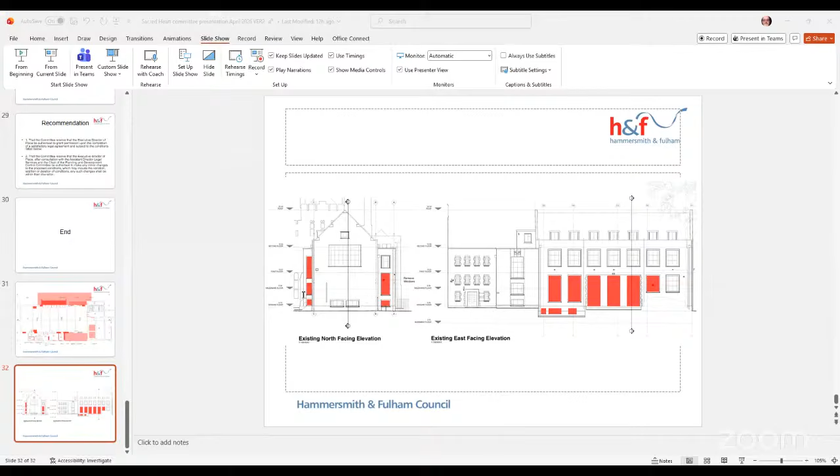It's the matrix one, yeah. Okay. Thank you, Chair. First, I'd like to draw members' attention to the addendum on this item for the matrix. Just to highlight one particular reference on page 366. The recommendation refers to Director of Planning and Property, and it should refer to the Executive Director of Place. Otherwise, it's just a minor tweak.

So this application relates to 2 additional floors at roof level for the creation of office floor space, some solar panels on the roof lights, erection of ground and first floor extensions, and various alterations to the facades. Notably, there was an application approved in 2025 for a very similar proposal. The main difference is that proposal involved 1 additional floor with slightly less floor space. The current proposal involves 2 stories rather than 1, a slightly higher increase in height by 1.6 meters, and notably an uplift in floor space.

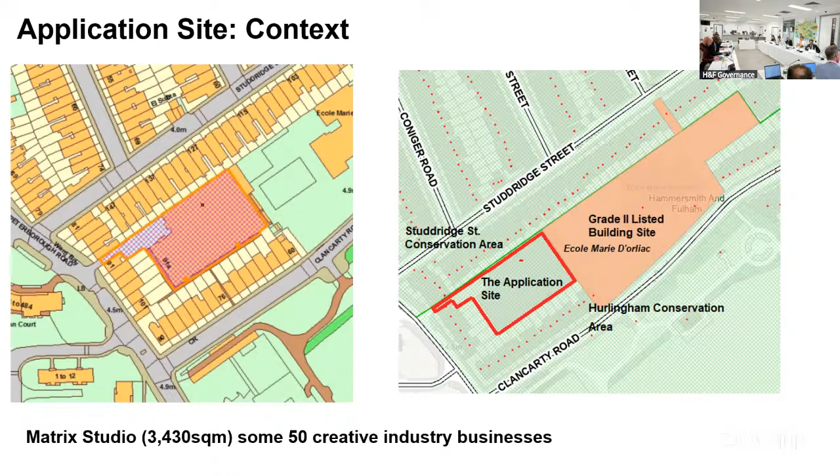This is just trying to highlight what the difference is. So on the left is the existing buildings, on the right-hand side is what's been proposed, highlighted in yellow. The areas that have been approved previously on the 2025 permission are highlighted in yellow at the bottom of that image. And then you've got what's been proposed and what's been approved.

So if you're looking north, on the south side of this image is Studdridge Street. The image on the bottom is what was approved previously. You can see the roof form. The building ground floor effectively has some minor extensions in this area, but essentially it's all this sort of grey matter at above ground floor.

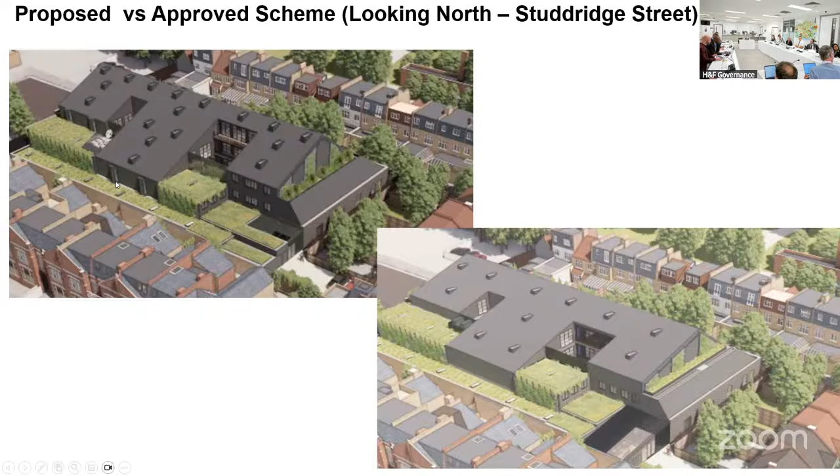Sorry? It's not showing? Stopped. Is it the internet? Let's try to rejoin the meeting. Let's have a look. I don't know how we did that. That one. The internet connection just cut out. We got it back on, but we then got to go through. What's that one? That's what I copied. Here we are. Sorry, apologies. We're back on.

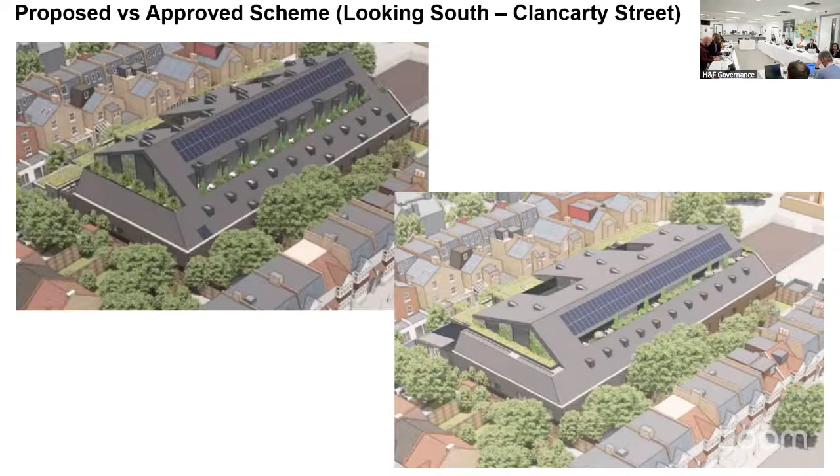Overall, in terms of objections, we had 24 objections concerned about the impact on the conservation area, the impact on the listed building, bulk massing, overdevelopment, etc. Essentially, all of those things were pretty much the same as what members have seen previously on the previous permission. So the slight increase in height we feel is modest and still sympathetic to the conservation area and to the setting of the listed building. In terms of daylight and sunlight, there's no additional harm or worsening of the existing scenario.

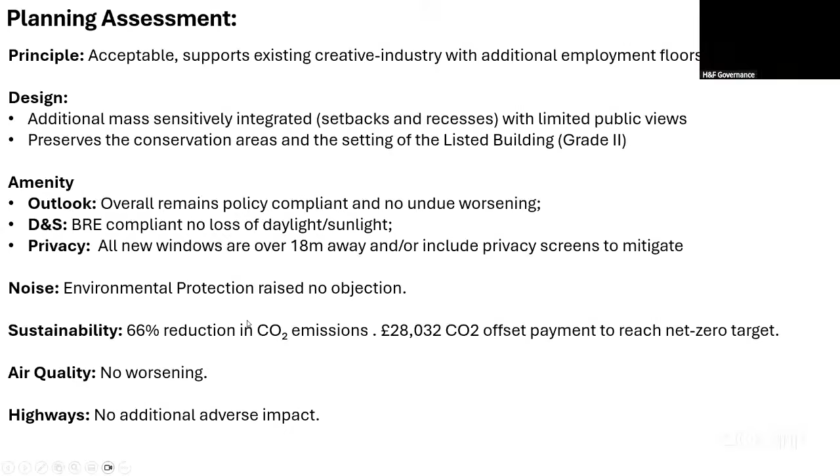sustainability, the 66% reduction in CO2 emissions with a £28,000 payment in lieu, and much of that is picked up in the Section 106. So you've got 10% apprenticeships, 10% local procurement, affordable workspace being provided, 100 square metres of which 20 will be 20% below market rate in perpetuity. And then you've got some trees as a result of this site being a major application rather than below the threshold.

So there's a £46,000 contribution towards some trees. And then there's some section 278 in relation to some highway works and then some monitoring. So we're looking to recommend that for approval, subject to committee.

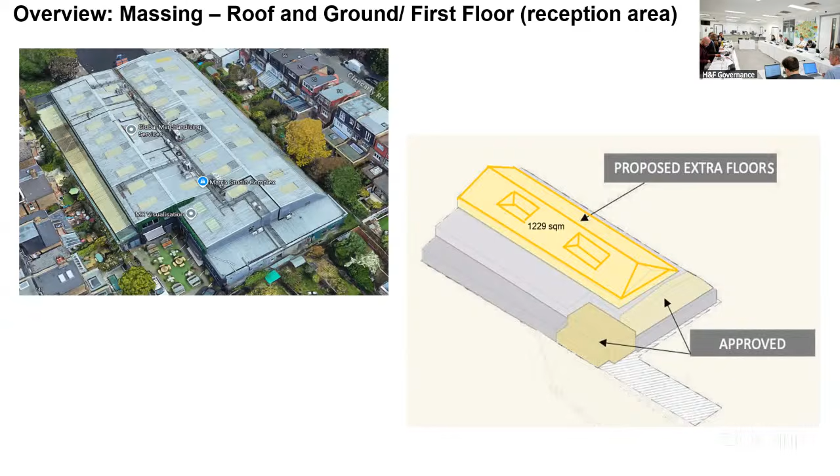Could I just ask, a lot of the objections seem to be about height and bulk and so forth, and effect on the surrounding properties. Could you give me 3 figures, please, which is the extant AOD, the approved AOD, and this application AOD, so I can gauge the differences in heights, please?

Just doing it by eye, would it be fair to say that the difference between extant and proposed looks about 45% higher? Well, if I look at the ground floor, you could say it could be about 3.5 to 4 meters high. The next floor could be about 3 meters high. That's 6.5, and if you add the floors on top...

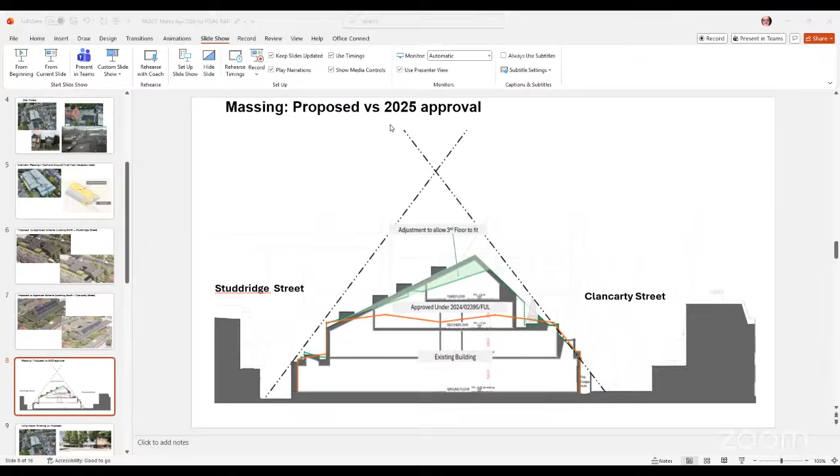And then on recommendation 2, on the same page of the report, Councillor Treyer? For. Councillor Melton? For. Councillor Painter? For. Councillor Pascal-Tilbury? For. Councillor Carmel? For. And I will also be voting for, and therefore the item is approved.

Thank you very much. Thank you for coming. And we move on to our final item, which is item 11, the chapel on Archer Road.

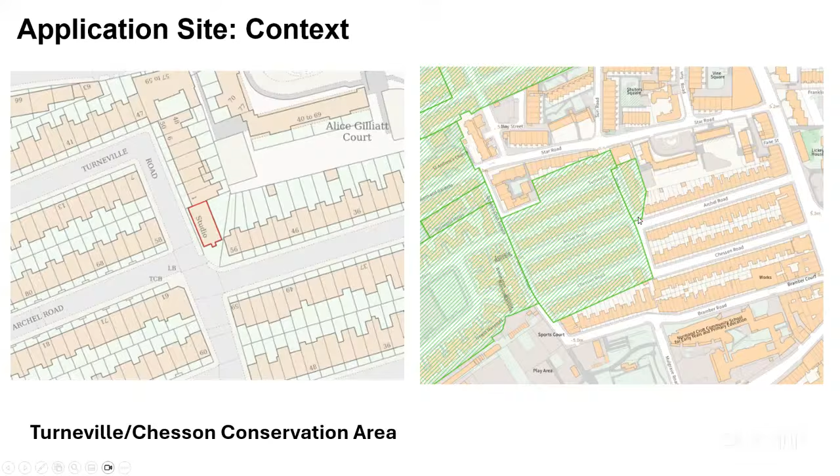This is the application site on the left-hand side, highlighted in red, the junction with Turneville Road and Archel Road. On the right-hand side, you can see the site sits in this location, where my cursor is, within the Turneville Chesson Conservation Area.

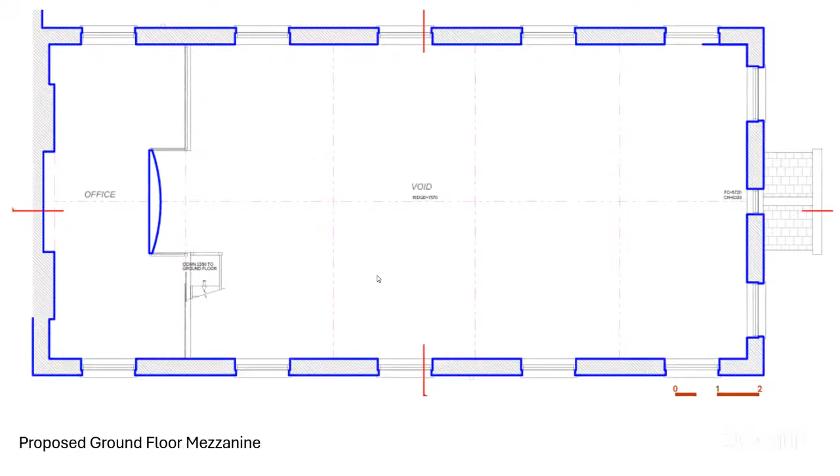There were some representations received: 2 objections, 2 neutral comments, and 4 letters of support. Essentially, the objections suggest there's no demand for the nursery, and surrounding streets might not be able to cope with the increased traffic. The letters of support welcomed the wider community benefits of a nursery, activating a vacant building, and acknowledged that the traffic impact will be quite modest in this location.

The neutral comments generally say the proposals are positive and subject to conditions, with no objections. In terms of planning assessment, loss of the office to nursery has wider public benefits and is acknowledged as something welcomed in the local plan.

There are no design alterations, so there's no harm in terms of impact on the character of the conservation area. In terms of residential amenity, there's no impact. There are some conditions attached relating to sound insulation and the external play area, as picked up in the addendum.

In terms of highways, a full transport assessment has been carried out because of the change of use. The site is in a PTAL 6A, which is good public transport, car-free development. A school travel plan has been secured and monitored to ensure a sustainable means of transport, with a minimum of 90% by walking and cycling.